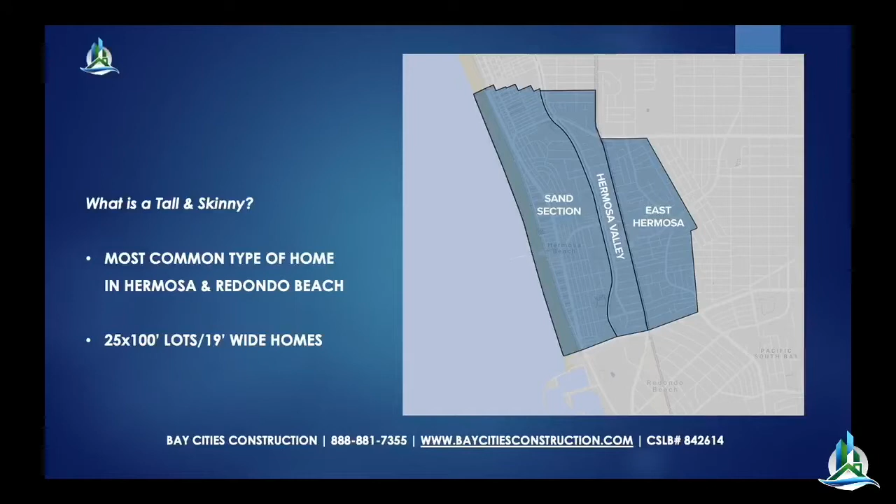So let's talk a little bit about the geology of the South Bay. This map covers Hermosa Beach, and most people don't know this, but Hermosa Beach has expansive soil, liquefaction soil. It's literally been infilled, this area has been infilled. What that means for earthquakes is it's really the worst ground to build a house on. Liquefaction soil is a really bad deal, and there's quite a bit of it, along the edge here in Hermosa, and a lot of it in Torrance, North Torrance. It's just something you have to be aware of, especially if you're doing new construction. You should have your soils engineer assess it so that the structural engineers can design for the soil.

All right, so basically you've got a front entry deal. These lots are typically between 25 feet wide, could be about 30-40 feet wide, by 100 feet long. So it's a big rectangle.

All right, so how do we protect them? What do you need to do? Before we do that, we're going to take a little quick break.

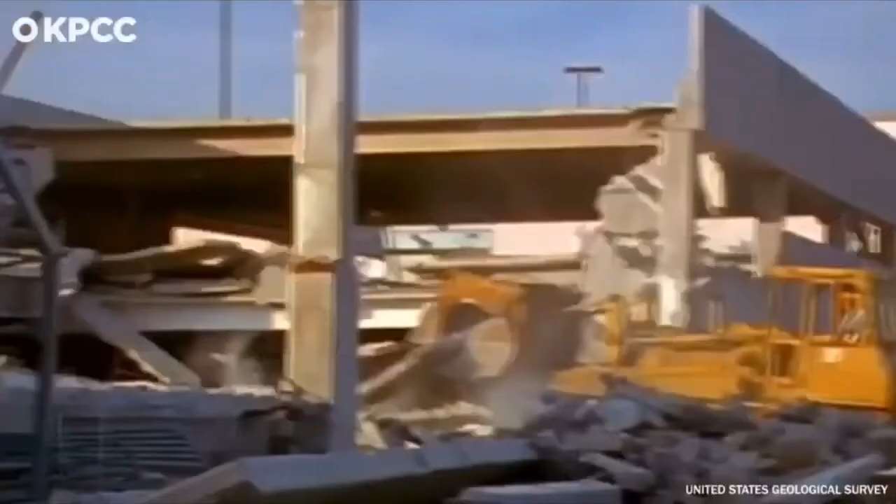I love Los Angeles. Movie stars, surfing, one of the most diverse cities in America. Some days, it feels like paradise. But any second now, that could all change. Because the big one is coming. We're better prepared for the big one than any big city in America, which is to say, we're woefully unprepared. An earthquake so large that the Los Angeles you know will be gone. It's going to be chaos. Thousands of fires will break out all over the city. The power will go out. Clean water will be scarce. They don't understand that it's not going to be just one big shake, but it's going to be thousands of shakes for months or years. There's nothing we can do to stop it, but we can get ready.

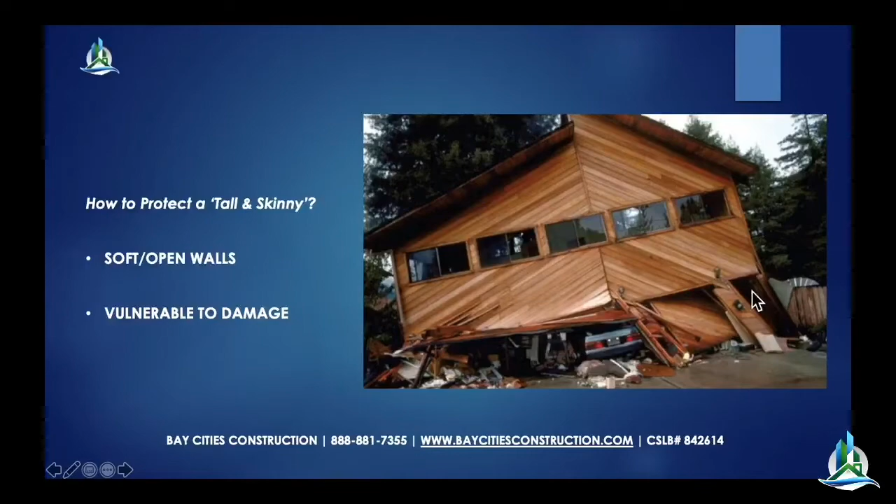All right, let's get into it. So this is what happens. Ultimately, when the front of the building doesn't have enough lateral reinforcement during the earthquake, it just collapses. In this case, it looks like when it collapsed, it moved maybe about 18 inches to the left, and it's vulnerable. In this particular house, it had the opening for the garage, another opening for a one-car garage, and then the opening for the front door. So that entire first floor was soft.

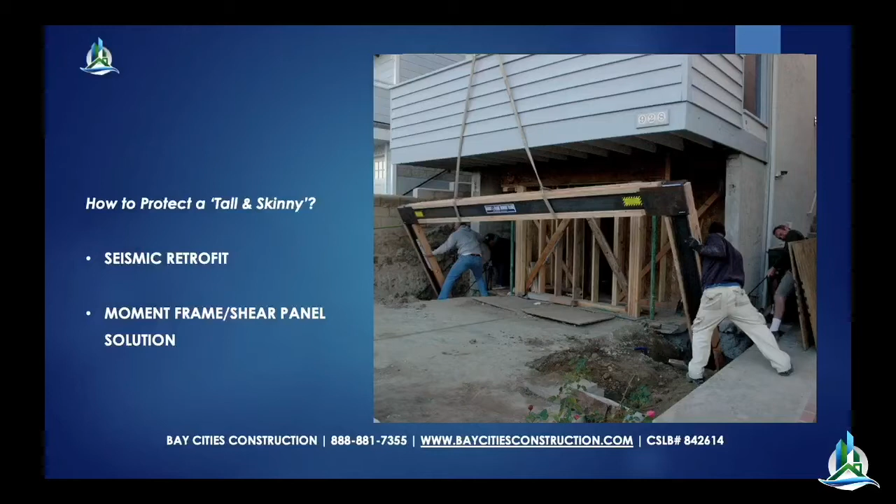It's vulnerable to damage for sure. So in some of the buildings - this is a property being retrofitted in San Francisco - it's very common to see a moment frame. This is a moment frame made by Hardy. It's basically two steel columns and a beam, and it gets attached to the wood framing, and it gives you lateral strength - left and right, if you're looking at the building. That's one of the methodologies for retrofitting a soft story building, a soft story house.

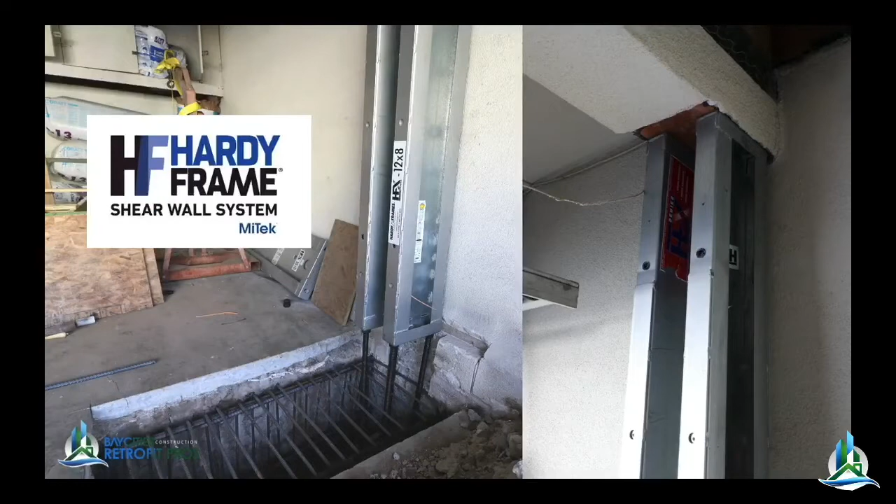This is a deal that we worked on. We used Hardy panels - these are basically strong steel panels that go into a grade beam that has very specific steel cage, steel reinforcement in there, and it's attached on the top to whatever the wood member is. So the idea is that this gives the beam rigidity, lateral force resistance. That's one of the other methodologies.

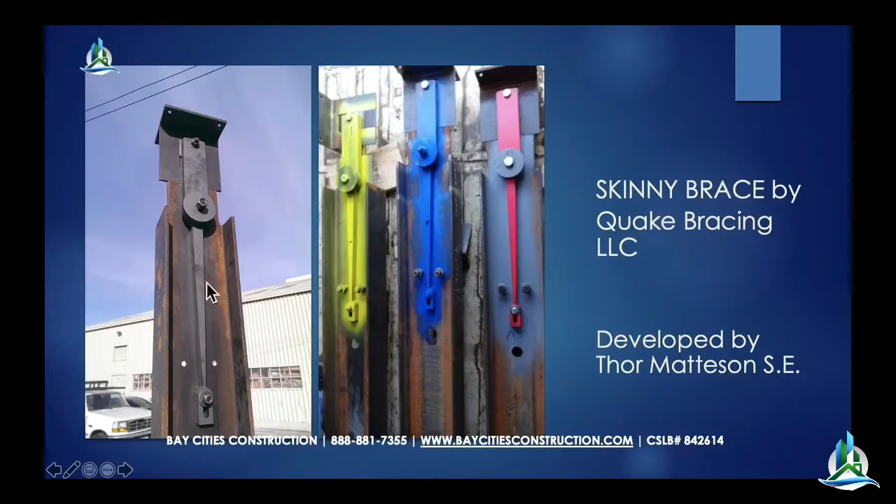This system is attached to an I-beam, and that I-beam is buried into the ground. Let me show you a quick little video about how this gets installed.

Yeah. So this is considered a soft story building, right?

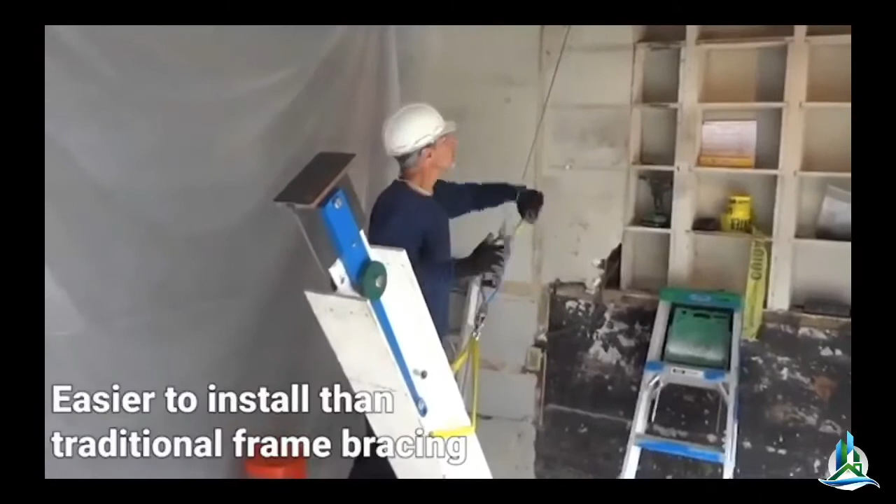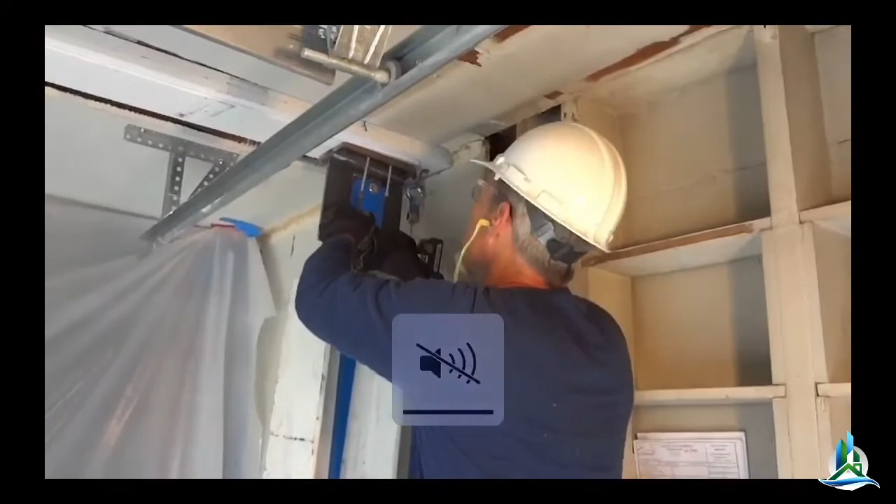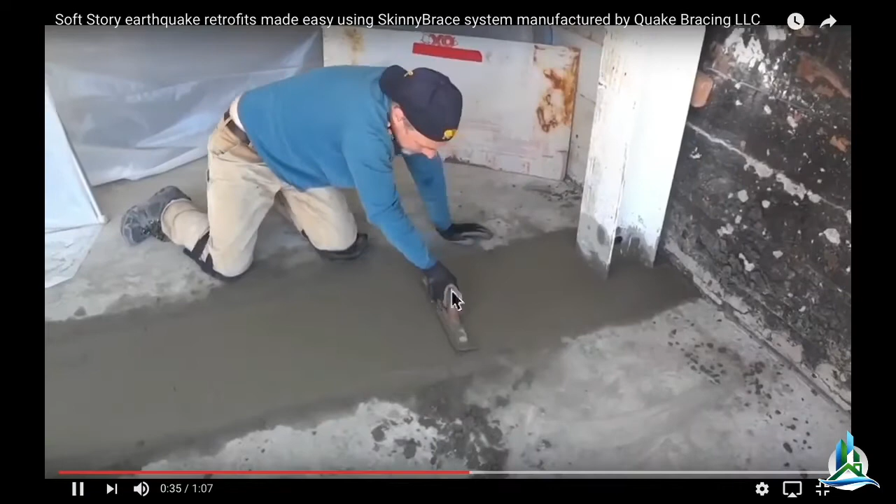This is considered a soft story building. In this case, you're jacking it up because it's heavy—that beam probably weighs about 800 pounds. But you see how thin the I-beam is? You see how this beam is really thin? And here, that's actually Thor dropping that in, and that's the steel cage. You fill up the cage, and then ultimately fill in the concrete, and you're good to go.

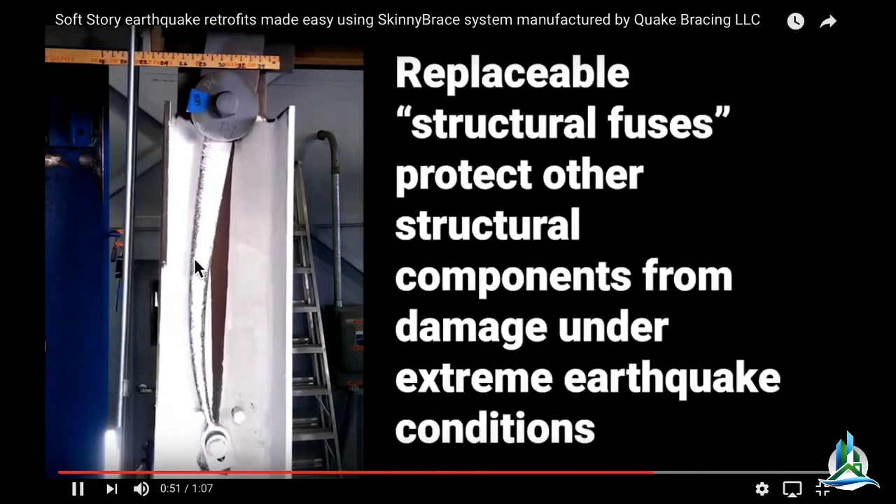This is a representative testing the movement of the frame. You can see the paint as this area deflects, kind of chipping off the steel. It really is a cool invention, and relatively affordable to install. It's cheaper than a moment frame, and in some cases you can't even use a moment frame. So I'm all about using the right methodology for the job.

If you want to check that out, you can click on the URL there and go to his site—he's got a couple other really cool videos there. I wanted to show you the skinny brace frame system. Now, he doesn't do the engineering for it—you've got to get an engineer. If you hire us to do it, we do the engineering for you, and if this is the best solution for your property, we would spec this out as the engineering solution and that's what we would install.

Okay, so let's keep going here. Most of us don't realize how many—look, I've lived here in California my adult life, and a big portion of my childhood. I was here during the Northridge earthquake. Honestly, the technology now is so cool with the monitoring, but I think many of us are oblivious to how many earthquakes there are in a given year and how many faults are all around us.

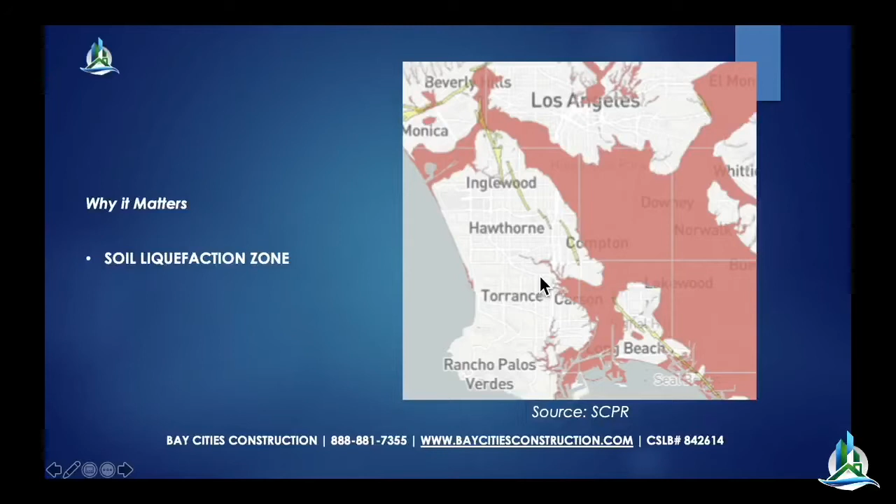This red is the liquefaction zone. That's pretty much all the dirt that's bad to build on, and you can see it's everywhere. This is Hermosa and part of Redondo down here. If we zoomed in, you'd see sections of Torrance also. But this is just a macro view. I just want you to understand what the geology looks like, what the deal is.

All right, let's watch this thing. This is actually a really cool thing. This is the full scale test of a tall and skinny building. Let's check it out.

What the hell is that? Is that somebody calling me or something? Okay.

All right, here we go. The earthquake's starting. Now, one house is braced and one house isn't. Let's see which one's which. Can you guys tell which one's braced and which one isn't?

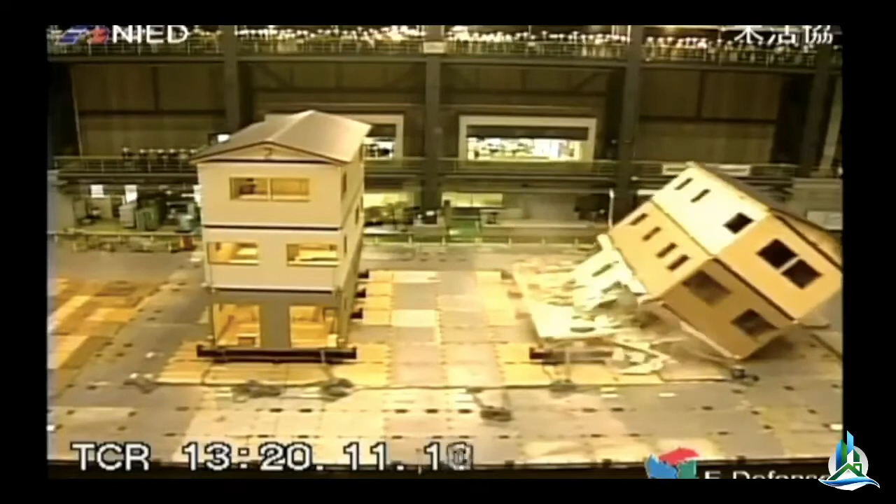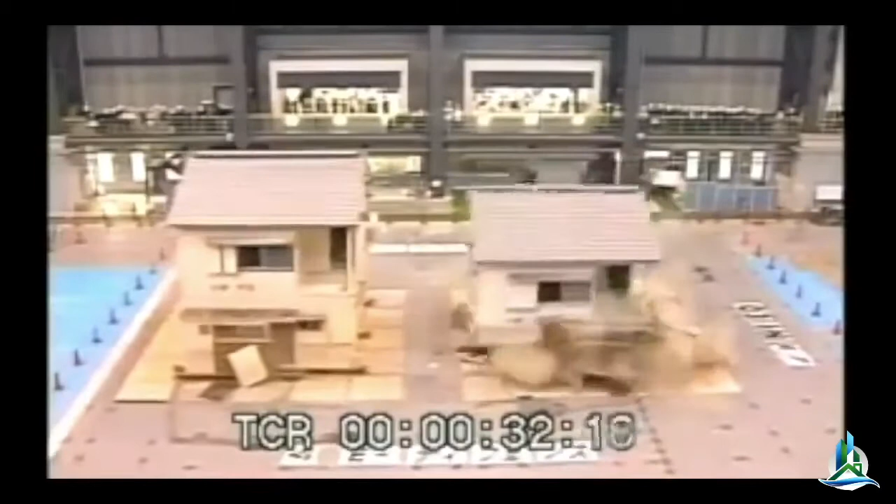It's crazy. Boom, and then it rolls over. Yeah, it's kind of a nightmare. It's not good. But bracing it works. Basically what you're doing when you brace the house is keeping all of the connection points together, like the connection points here and up here. Those are the weakest parts of the house or structure, so you're keeping them together.

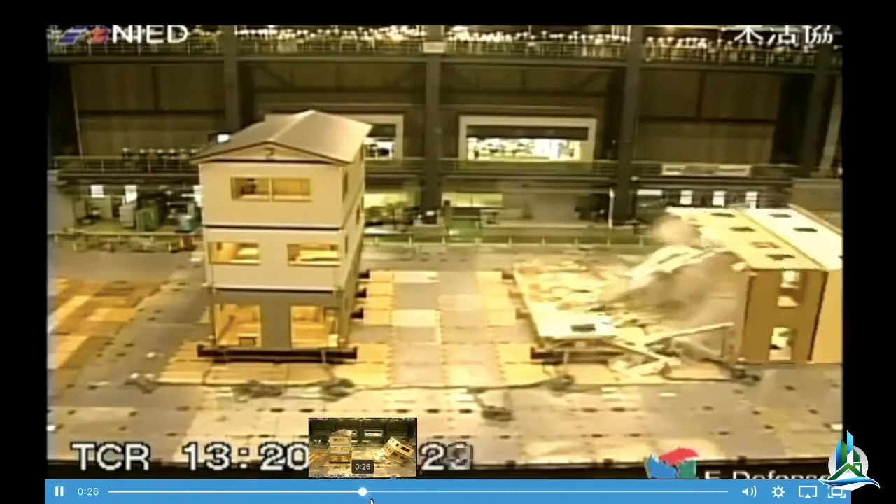Let's go back real quick. This is a full-size earthquake shake test. Look at that, see, in this case it broke here from the foundation, and it broke here between the first and second floor. Look how much this one's still moving, right? This definitely moved 3-4 inches in each direction. Engineers find acceptable drift, I think, to be 2% of the height. So when you measure from here, look at that, that's crazy.

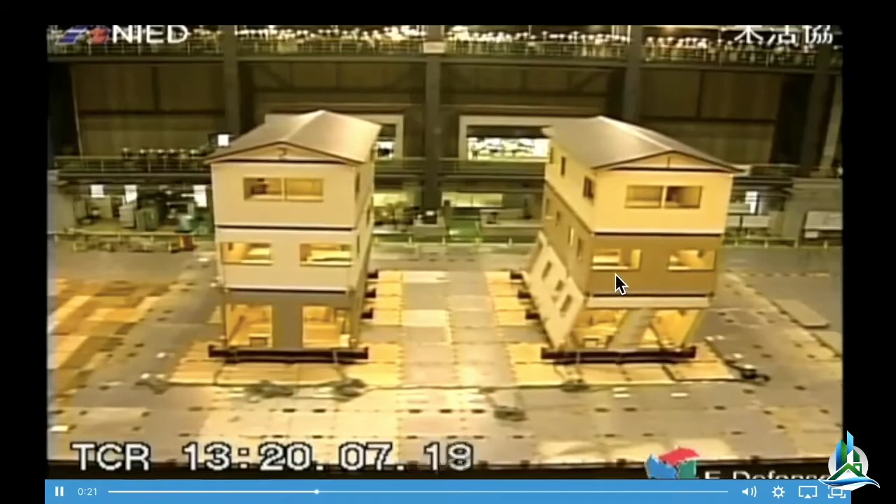See how the swaying is less violent on the one on the left than the one on the right? And here it's going to its maximum point, and it falls under its own weight once it reaches that. Look at all these guys studying the deal up there.

So these guys, when you have a full scale test like this, it's awesome. You learn a lot about how a building will perform. The engineers call the way the building moves its frequency, how it behaves with the seismic force. It's pretty cool. What do you guys think about that?

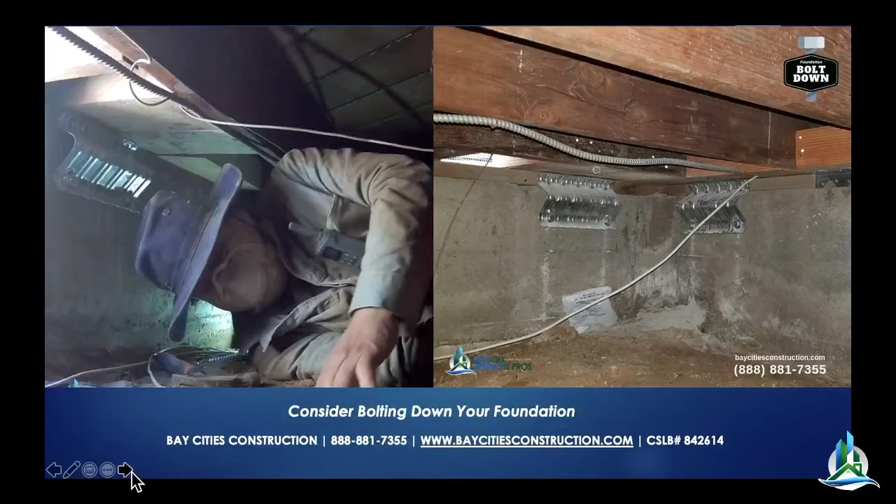All right, so let's talk about what we do to keep it together. Like I showed you, when the house separates from the foundation, it's because its connections are weak. So what we do is add these plates. These plates get bolted into the concrete, bolted into the mud sill, and then we tie. In this case, we put blocking between the floor framing, and then tie it to the mud sill. So the floor framing is blocked, the blocking is tied to the mud sill, and the mud sill is tied by this plate to the stem wall. Together, it acts as a system when you do this all the way around all 4 walls, and it keeps the house on the foundation.

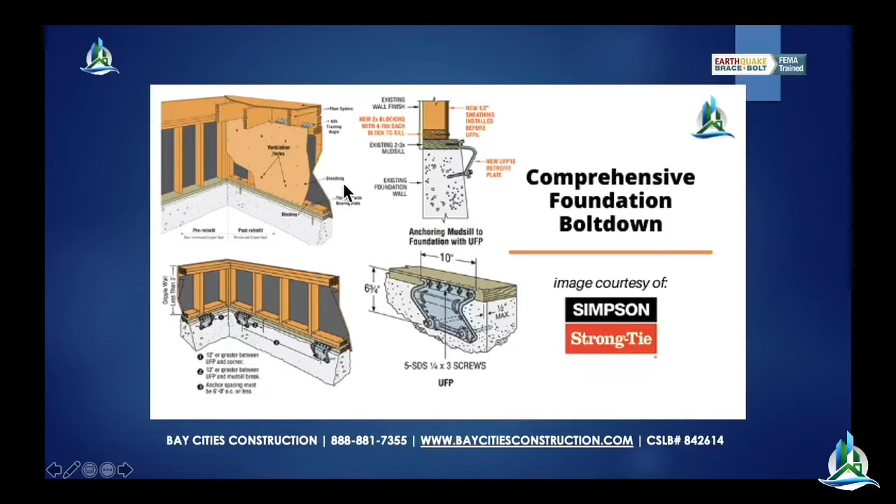You would put the plywood all the way around the entire house. Now, this is actually a very interesting project that we did a few months ago. This guy didn't have floor joists like normal. The subfloor was tongue and groove and it sat directly on the mud sill. The only problem was that the mud sill was recessed in, so it was very hard to tie all of these together. So what we did is we did a strap to keep all of the tongue and groove together.

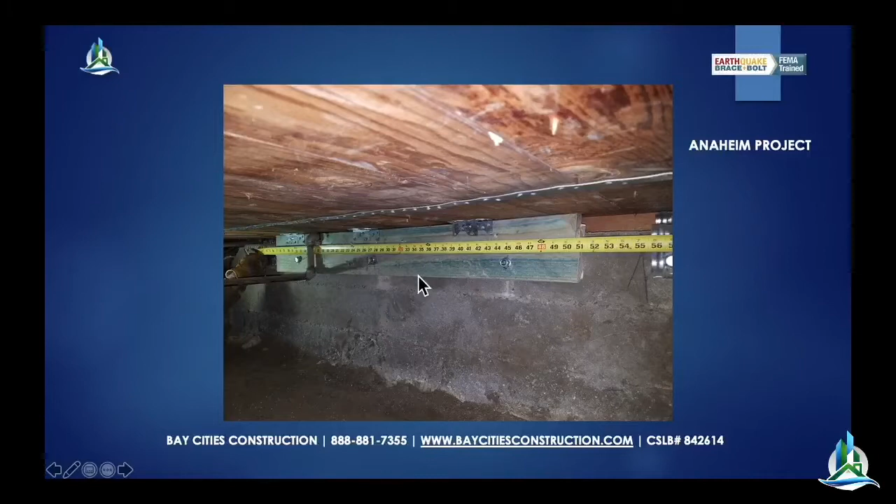Then we put in these ledger boards, and we put in a series of A35s, and the ledger boards went straight into the stem wall. And then we kept the mud sill tied down by using these URFPs, and together that tied everything back, it dragged everything back onto the foundation.

This is another different shot. So you can see we put these things very close by. There's one here, there's one there in between each other, and then we tied this way. So these coils went the entire length of the building. It was pretty cool.

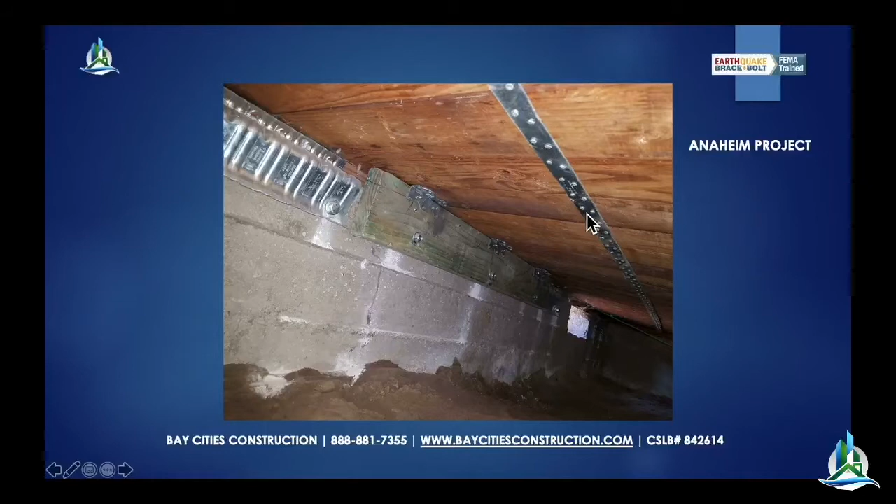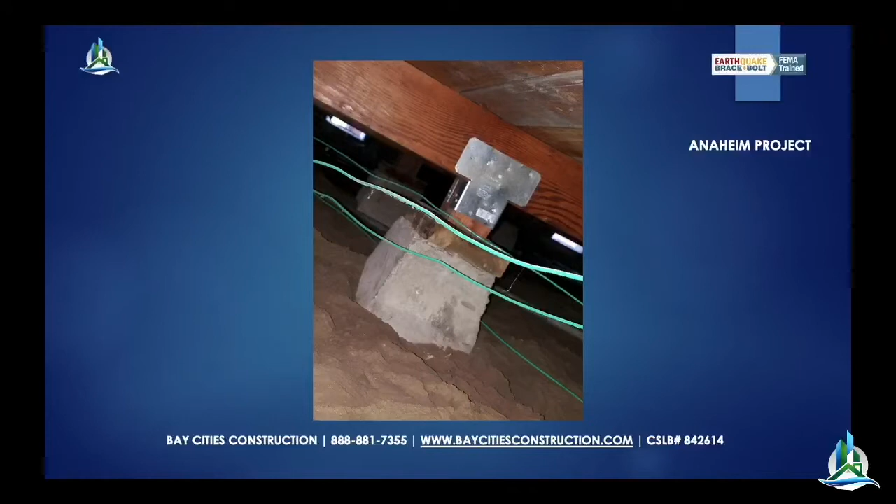These little piers, we did this just kind of as a redundancy, but they really don't do very much. Most of the work is being done by the exterior walls. So the exterior walls have to break first before the piers really see any significant force, but we did them. Makes people feel good to see some steel.

This is kind of a close-up shot of the URFP and then the blocking above it. Then there'll be more hardware here as the blocking continues.

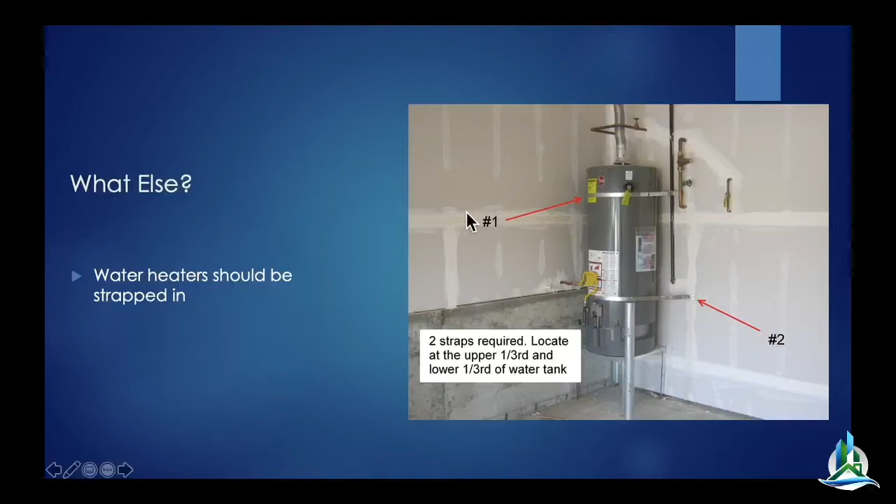So this case here, this is strapped down and all that according to building code, but if you have a water heater inside the house, you should get rid of it. Just change it out with a tankless. Besides, if you have a tankless, you never run out of hot water.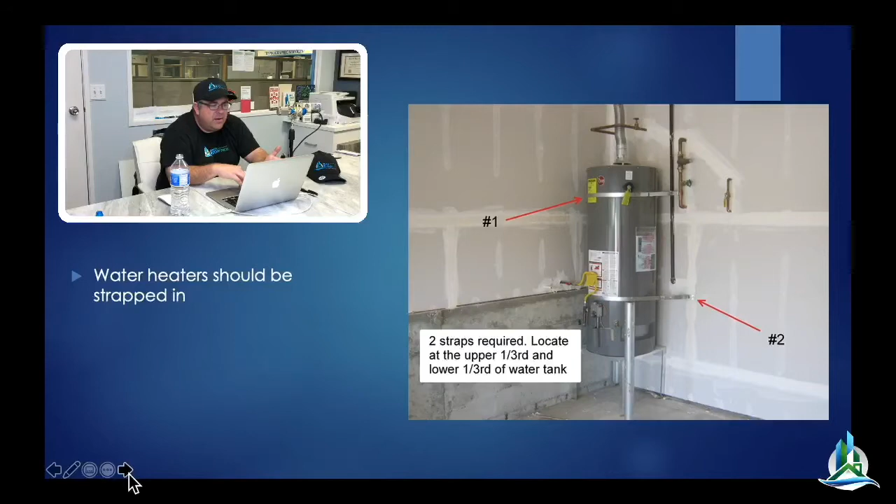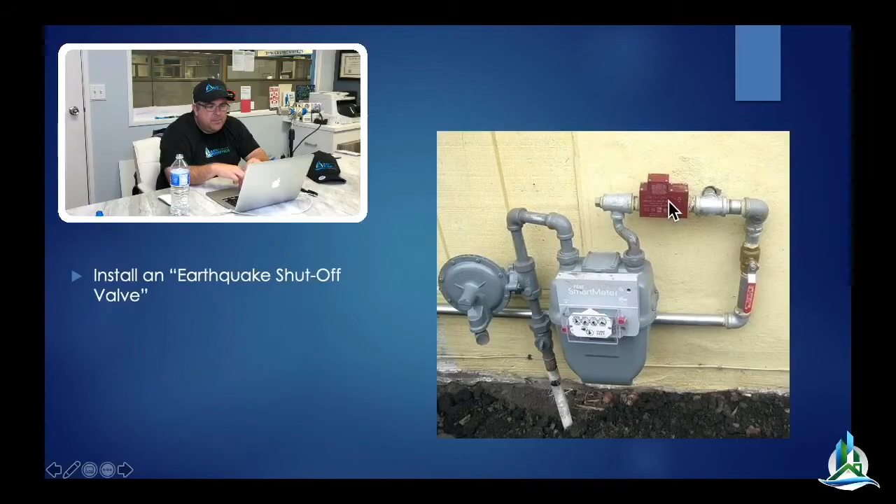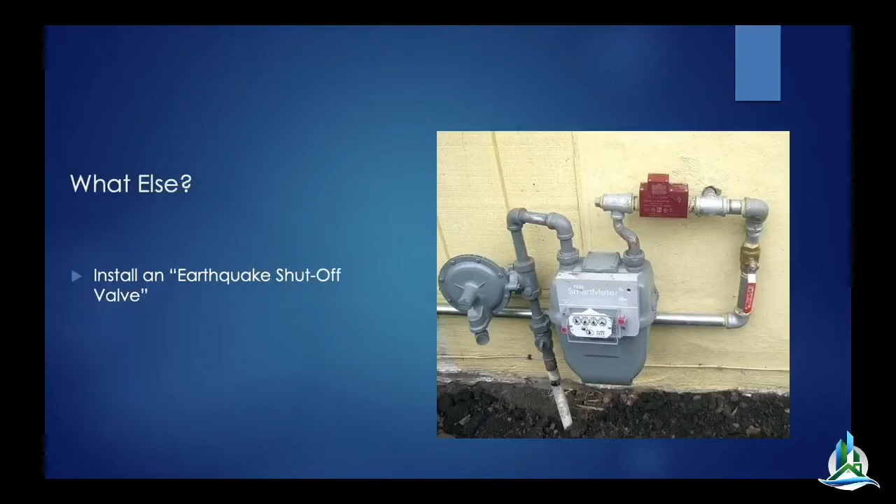When we went to Trona over in Ridgecrest, most of the damage that we saw was from fires.

Big damage - even if your house doesn't get damaged by an earthquake, or your neighbor's house doesn't get damaged, a fire could occur. This little unit, we don't even install them, I'm just telling you this for your education. I think you can buy them for 120 to 150 bucks on Amazon, and get a plumber to install them for about 200 bucks. It's well worth it, believe me, it's a very good thing. We had one installed at my place just recently.

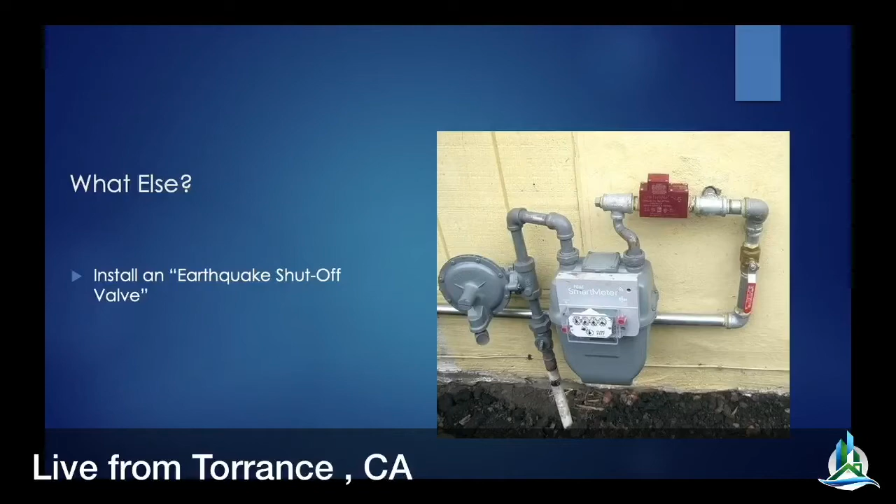Fire extinguishers, super important - make sure you have some. I bought a big commercial fire extinguisher, I think I paid $200, about 2 of them, and put them in my house - one in the front and one in the back. I didn't lock it up or put any chains on it. I want to be able to, if God forbid I have a fire, if my neighbor sees it, or somebody's walking the dog and there's a fire, they can see the fire extinguisher, grab it, and shut the fire off right then and there. You want to make it easy for yourself or others to put out a fire. Those are super important items to have.

If you want to learn more about earthquakes and what's happening, you can download the City of Los Angeles Earthquake Shake Alert LA app on your phone. It's kind of cool, there's some pretty cool features in there. Let's take a look at that.

Before we go to some questions, I want to make an editorial comment. About 2 months ago, I bolted down my house. Last year we did about 4, maybe 5 bolt downs in the last half of the year - we did quite a bit of them, like 5. Since we finished my house, I've probably done another 3 or 4 this year.

What I wanted to tell you is, look, I rent where I live, and I paid for the bolt down out of my own pocket - the materials and the labor. The reason I did that is because I don't want to move. When we went to Trona and Ridgecrest, there were entire neighborhoods that were red tagged or yellow tagged, which meant people had to move out. In a red tag house, you can't live there - the sheriff will come, the fire department will come, tag it, and you can't go back in. You can actually be arrested for living in there. So I don't want to do that.

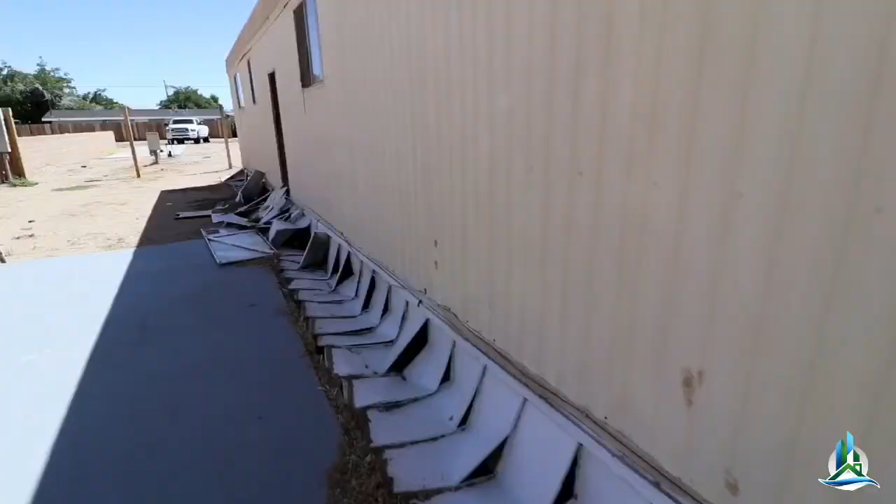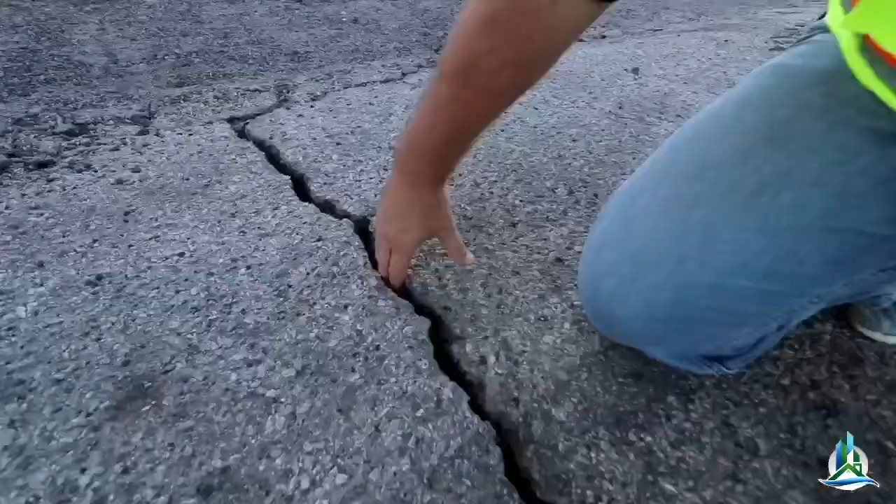Do you know that a big earthquake can produce a wave that's 2 feet tall? Hi folks, I'm Alex Rodriguez, and I want to protect your house for $199 a month.

I'm the owner of Bay Cities Construction, and after visiting Ridgecrest, it's clear to me that you can prevent a tremendous amount of expensive damage by having a seismic retrofit done to your raised foundation.

Have you ever wondered if your house needs to be bolted down? And have you ever wondered what could happen to your house if it's not braced and bolted down? Let's check this out. Let's get down and dirty.

So this is how we do a bolt down. We bolt down the mud sill to the stem, then we connect the floor joist to the mud sill, and then ideally you connect the subfloor to the floor joist. That's the system to keep this connection intact while the floor is violently shaken.

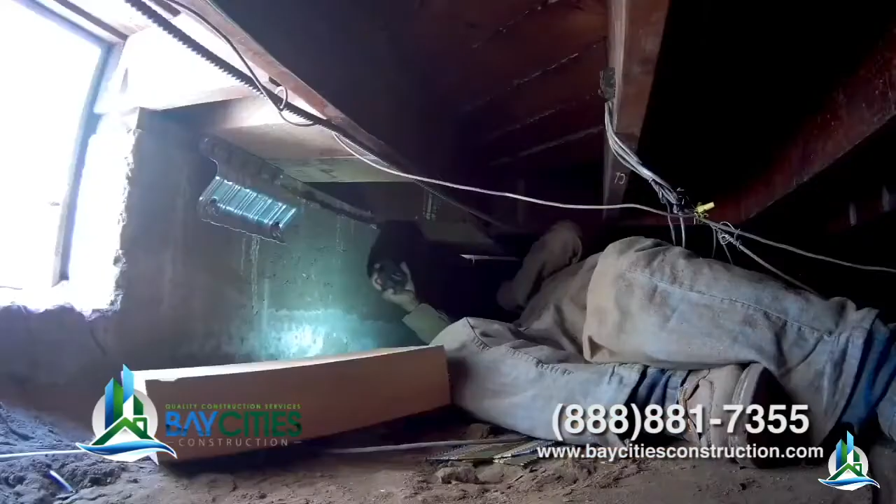We live in earthquake country. Dr. Lucy Jones reminds us that earthquakes are random. We can't predict earthquakes, but we can prepare.